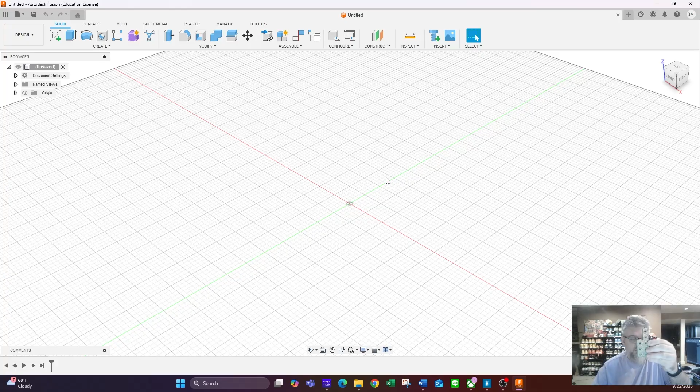So I've gone ahead and opened up Fusion and gotten to a brand new file. We're going to start to assemble our individual cube that we made in the last video into our full puzzle piece shape. This is the one we're going to work on in this video. It's a pretty simple 5 in one row, 3 in the next row, so we've got our 8 puzzle pieces. Looks kind of like a house with a chimney maybe.

So first thing we always do with a new file is we save. We're going to call this dark green puzzle piece. Again, our name should be relatively descriptive, so that way if we see the file, we very quickly know what it is. We don't have to go through and open up a whole bunch of untitled files to find the right one we just worked on.

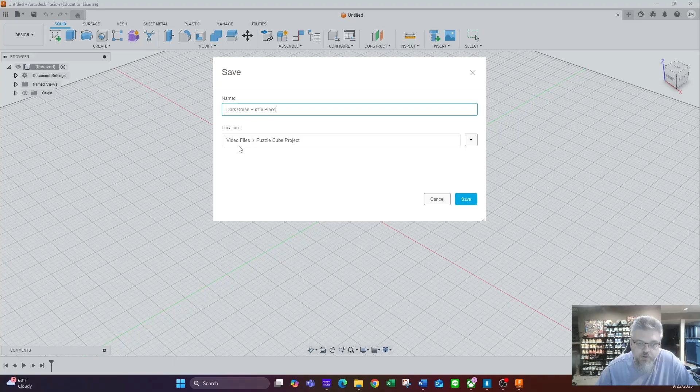We want to make sure the location is the right place. So not only do I want to make sure it's in the video files location, but I'm looking for the exact project we're working on, in this case Puzzle Cube project. Just like before, if it's not the right location, we hit this drop down arrow and navigate through here to find the right place. We can always hit new folder if we need to create one, say we forgot to create it last time.

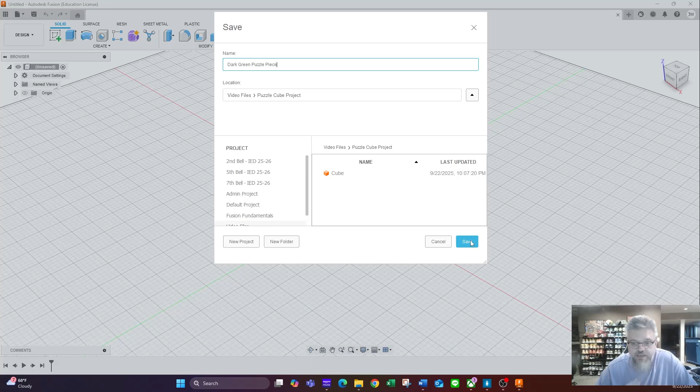You can see we're already in Puzzle Cube project and we've got that cube file we made in the last video, so in this case we know we're in the right place. I'm just going to go ahead and hit save since I've got the right name up on it. Just like last time, you can see the icons changing. We've got the colored in icon up here, we've got the name of the file, and we've now got version 1, or V1.

So now we're going to start assembling. This is one of the few times you don't start a new file and just go create sketch. We're going to start inserting components. If you remember at the end of last video, we changed that body of the cube into a component. What we're looking for is this button right here, Insert Component, in the Assemble area. Based off the way my screen looks, it's right underneath Utilities.

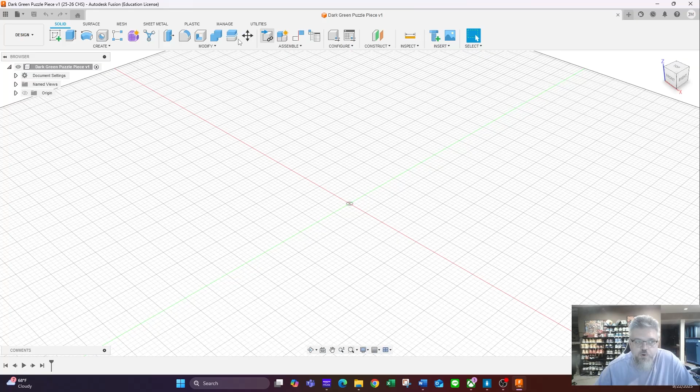I know earlier today, because of the resolution on the screen I was using, there weren't as many buttons, so it was a little bit further to the left. Again, you're in this Assemble section of the toolbar, your design toolbar under Solid. If you can't see this button, you can always click on the word Assemble to get the drop down, and it's the very first one, Insert Component. So we're going to press that button.

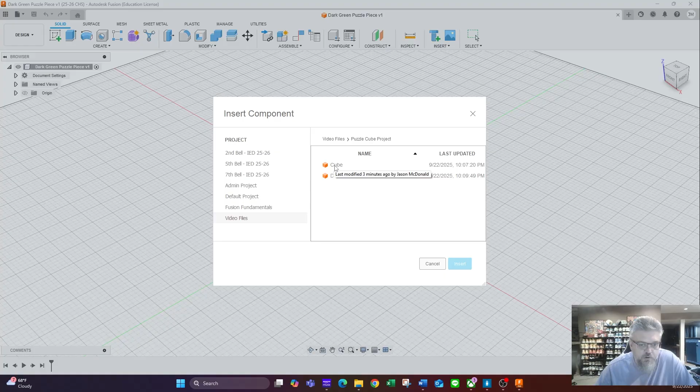You're going to get this pop-up window where it's saying, hey, what do you want to insert? In this case, we're going to insert our cube. So we're going to find our cube file that we created in the last video, we're going to highlight it, and we're going to go Insert.

So it should look very similar to before. We've got our gray cube. One big difference, we have these sets of arrows. For right now with this one, we're just going to hit enter, telling it exactly where we want. Oh, before we do that, we're actually going to change one thing. Right here we've got a check mark that says ground to parent. We want to uncheck this, then we're going to hit OK.

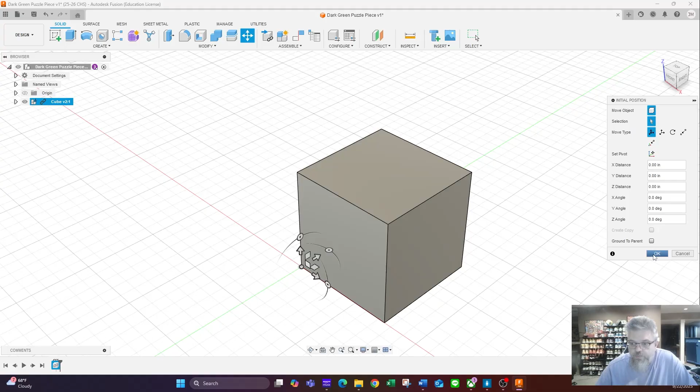If for whatever reason we forgot to do that, we forgot to unground it and we hit enter too quick, you can look over here in your browser at the component you just inserted, and you'll see on the icon there's a little anchor. We want to get rid of this so we can add and move multiple cubes. So we're going to right click on the name of that component and we're going to unground from parent. It's right here at the top, third from the top, and you can even see the description, just like the tool tips up above: unground from parent.

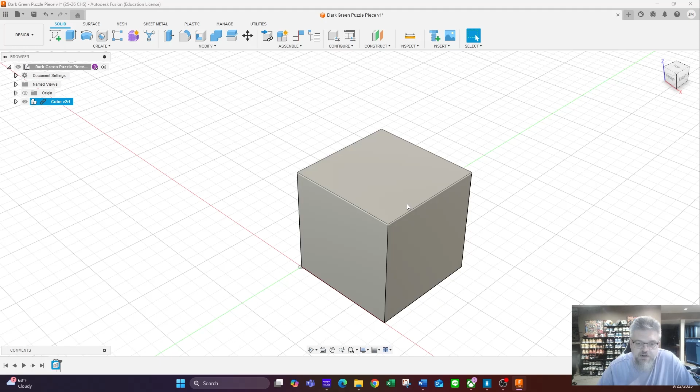And the reason why you do that is so you can move it independently. If not, it remembers the exact location in your original file and will not let you move it, which becomes pretty important here in a second.

So right now we've got one cube in our screen, and our puzzle pieces are 8 cubes. So we're going to make copies of this cube until we get to 8. In order to do that, we just right click on the name of that component again, go down to copy. It's about two-thirds of the way down. It just says copy, not this one up here that says move copy. We're going to copy.

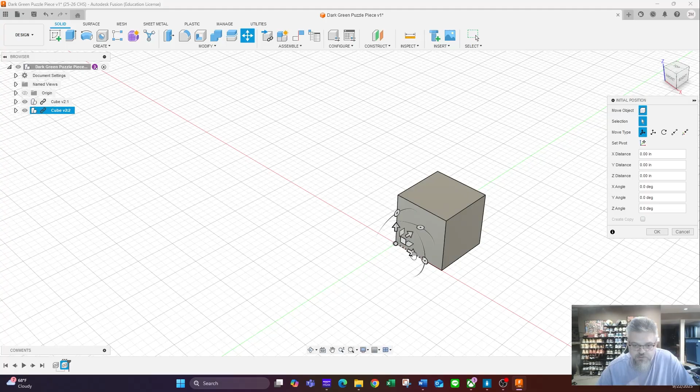Then we're going to click in the screen and press Control V to paste. I could have also right clicked and done paste, but I'm using keyboard shortcuts, so Control V pastes. You can't tell that it's pasted a new cube other than seeing it over here in your browser, but you've got your move arrows again. So we're just going to grab one of those arrows, left click on it, and move it off to the side. Now you can see you've got 2 cubes. Then we're going to press enter, or I could press OK over here.

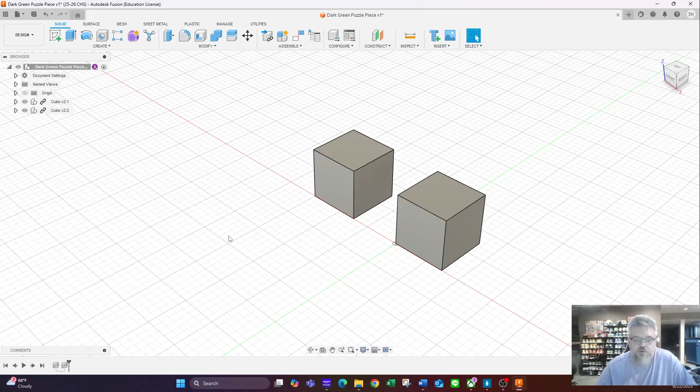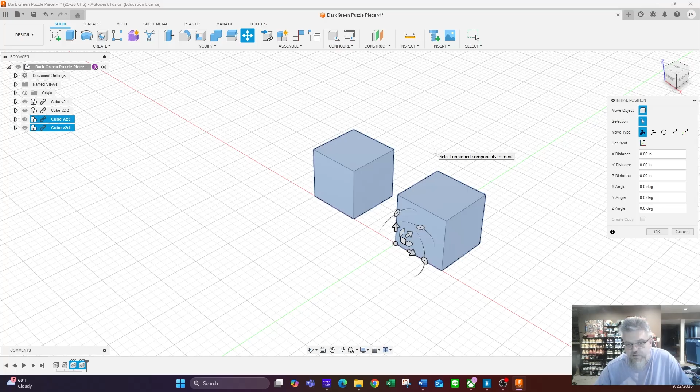So I can keep repeating that process until I get to 8 cubes, but I like to work smarter, not harder, so I'm going to do it 2 cubes at a time. If I left click on the first component, press and hold my shift button, and go to the second component or the last one on the list, then right click and copy, and paste. Then once I move the arrows out, I now have 4 cubes.

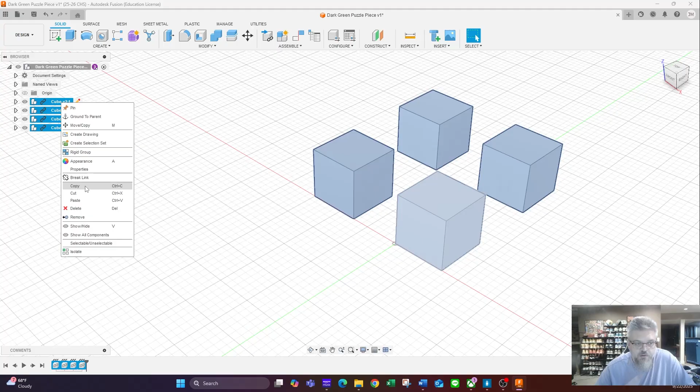And since I need a total of 8, we're going to do the same thing, but instead of doing 2, we're going to left click on the top one, hold shift, click on the bottom one. So now we've got all 4 selected. We're going to right click on the name of that component, copy, left click into the workspace somewhere, Control V to paste, and I'm just going to move them off to the side. Once I got my 8 cubes, I moved them off to the side. I'm going to press enter to let them know, hey, let's go ahead and set them right there for now.

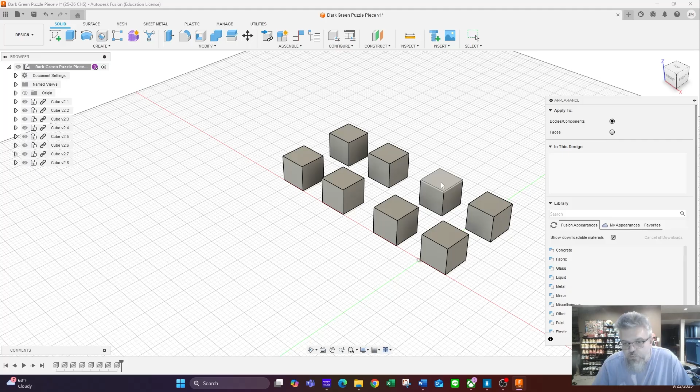So now we're going to do 2 things. The first thing we're going to do, to me it's a little bit more fun, we're going to change the appearance on these cubes. So I'm going to press A for appearance, that's A on my keyboard, and I'll get this pop-up window. In this case, the appearance, I can either do it to the whole body or component, or I can do it just to a face, which is one of the sides. In this case, we want the whole cube or the whole body or component to look the same. These are plastic dark green.

So I'm just going to search plastic right here in the library. I'm going to go down into the Fusion library, Fusion Appearance library. Now I'm going to scroll down a ways, and I'm going to look. In this case, I'm just going to find plastic, matte, and then green in parentheses. Sometimes you'll see they have a little download arrow, so I'm going to go ahead and download it. Not as important right now for this part of the project, but besides just the look, each of these materials has different components and specs, like strength and things like that. And when you start to get into the simulation part of Fusion, it's very critical that you have the right materials.

So I'm going to left click and drag this up into the design. I'm going to select all of my cubes, and then I'm just going to drop it in. Oh, it didn't work for me today. We'll just drop it in one by one.

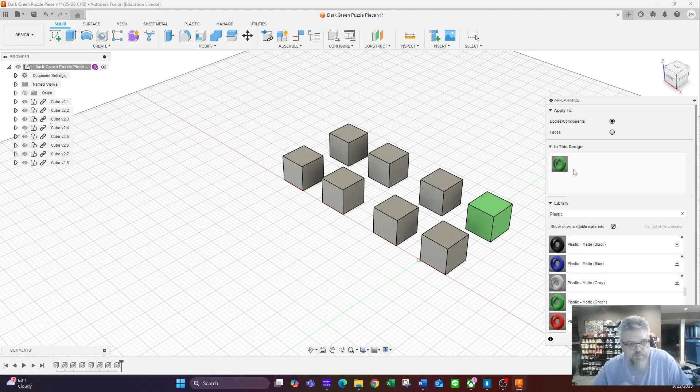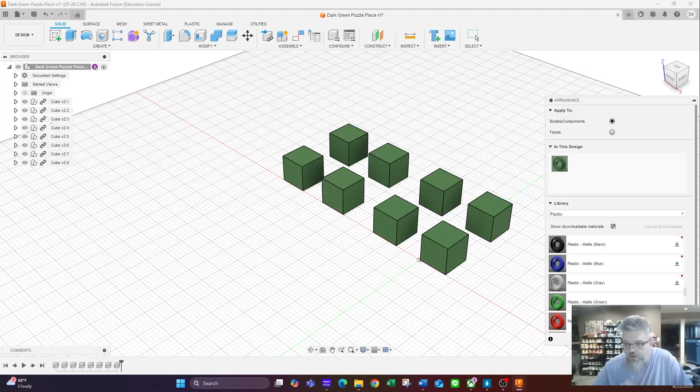Now say I don't like this shade of green for whatever reason, it looks more like lime green than dark green. If I double click on this one in the design section, I'll get a pop-up where I can change it between probably 2 million colors. You've got your RGB codes right here, and some options for roughness and reflectance down here. I'm going to drag this little plus down a little ways to make it a darker green, then click done, and close on my appearance. Now my 8 cubes, part of my dark green puzzle piece, are dark green.

All right, so now it's time to start assembling to get this shape. The way we do this is through a joint. We're going to click on this assemble button, and the fifth one down says joint, also J on the keyboard. I'll left click this, and I've got my joint pop-up. Again, we look to see what's highlighted in blue. It's saying, pick your snap point on component 1.

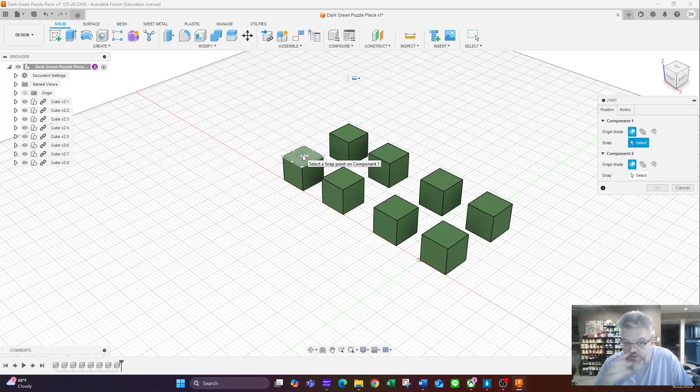So what a snap point is, if I hover over one of these boxes, let's change this to a top-down view to get a better look. If I highlight one, I've got 9 snap points here - one in the middle, and some edges and corners you can also snap on. So if you wanted to combine corner to corner, you could. But in this case, we're just connecting these snap cubes right in the middle, because that's where our knob is and the receptacle.

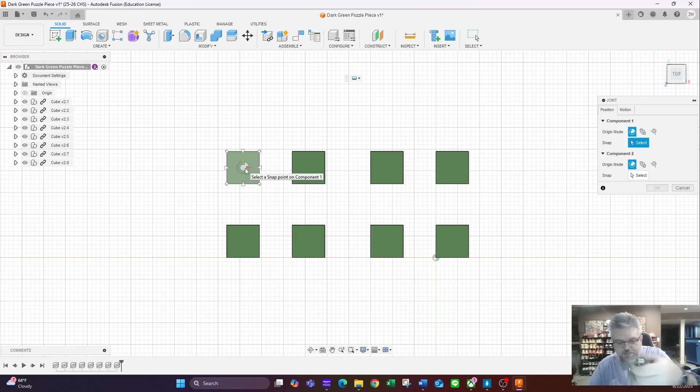So we're going to click on the first one, and connect that to the second one right in the middle. I'm going to change this back to the home view so we can get the 3D view, and you'll see they stacked right on top of each other. From here, I'm just going to click OK.

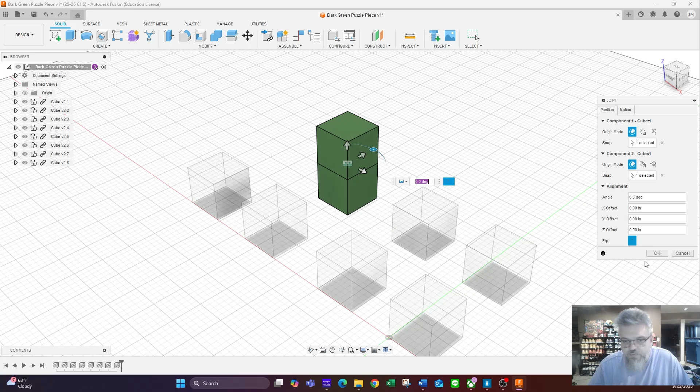If I wanted to give it some spin, I could, say I wanted to go 15 degrees - it would connect it but then spin it a little bit. I don't want to do that, so we're going to undo and join them a second time. So in this case, there we go. We're going to click OK.

Now, keyboard shortcut: if I press spacebar, that will repeat the last thing I did, so you'll see joint pop right back up. I'm going to click on the top of this cube, part of my double stack, then click to the next cube. When it animates, it doesn't show you that all of them are moving, but it still will do it. So if I click OK, now it's got all 3 stacked.

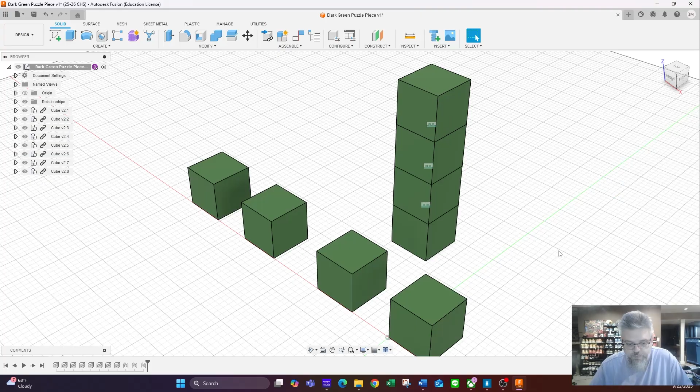Hit spacebar, click, connect, click OK. So my shape has 5 tall on one side and 3 tall on the other. I've got one more to go here, so we'll hit spacebar one more time, and we're going to hit OK. All right, so now I've got my 5 high.

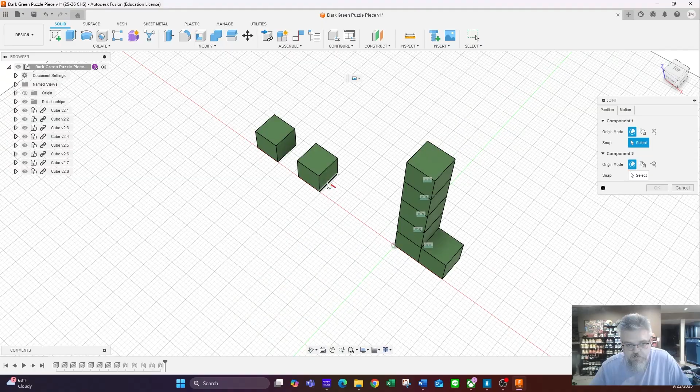Now I just need to get these 3 stacked up over here to the side, so spacebar one more time. Let's see if we can do this. Spacebar. Trying to see if I can get this to join the wrong direction, but it's not working for me right now. So occasionally when you join, instead of it going that way, the 2 cubes will go inside of each other.

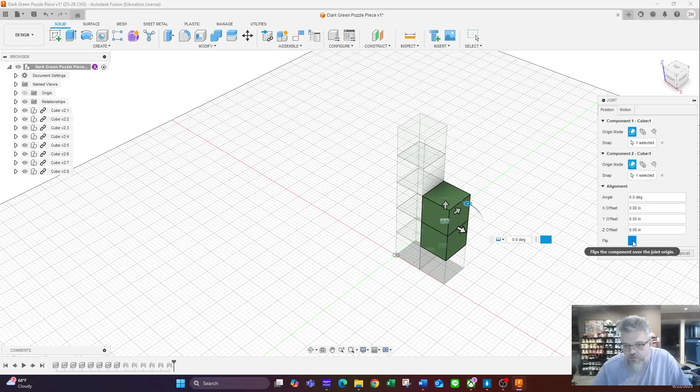If you just hit this button right here next to flip, it'll flip it 180 degrees and make the cube reappear. So if you ever join and instead of seeing the cube it puts it in the exact same spot, this flip button will flip that component over that joint origin, so it's a 180 degree turn. Alright, and so at that point we've now created our dark green puzzle piece. We're going to hit save, and we are good to go.

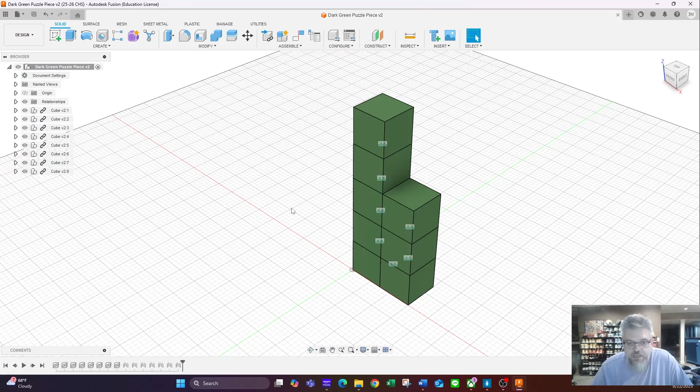Alright, I'm going to go through and work on creating the other 7 puzzle pieces, and then in the next video I will show you how to connect and get all of the puzzle pieces together to assemble the overall puzzle. Alright, so stay tuned and watch the next video. Thanks all.